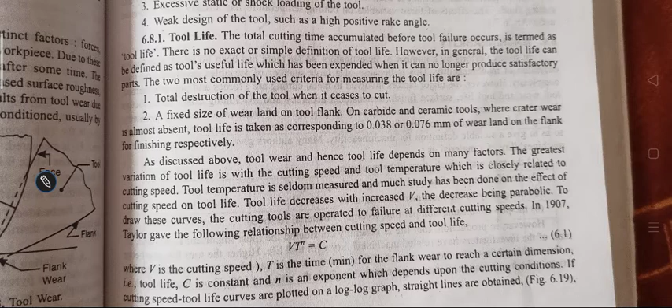इसमें बेसिकली जो टू मोस्ट कॉमनली हम लोग क्राइटेरिया यूज कर रहे हैं मेजरिंग द टूल्स के लिए, पहला ये होता है कि टोटल डिस्ट्रक्शन ऑफ द टूल व्हेन इट सीजेस टू कट. दूसरा, अ फिक्स साइज ऑफ द वियर लैंड ऑन द टूल फ्लैंक on carbide and ceramic tools. Where crater wear is almost absent, tool life is taken as corresponding to 0.038 या 0.076 mm wear land on the flank for finishing respectively.

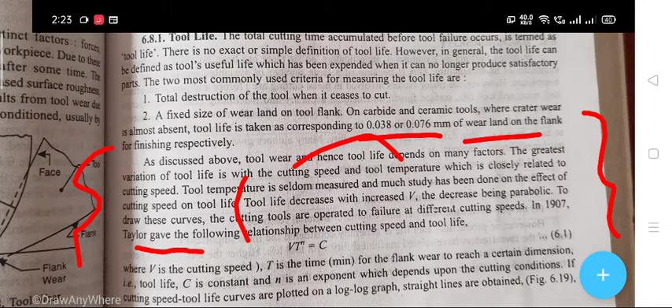टूल टेम्परेचर is seldom measured, so much study has been done on the effect of cutting speed on the tool life. So tool life decreases with increase in V, the decrease being parabolic. To draw these curves, the cutting tools are operated to failure at different cutting speeds. In 1907, Taylor gave the following relationship, that is V T की power n equal to C.

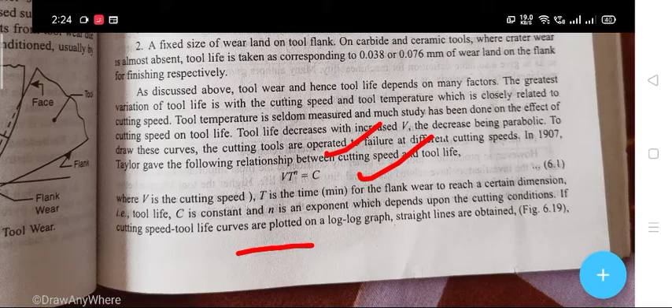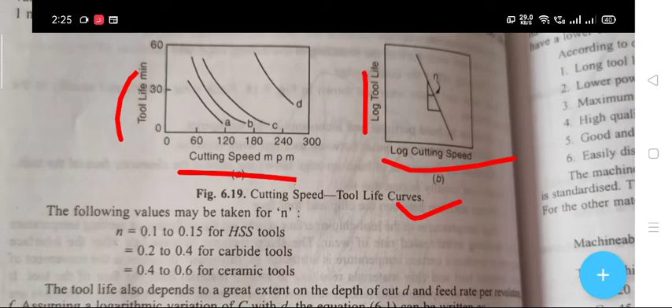There are following criteria for n values. n is equal to 0.1 to 0.15 for high speed steel tools, 0.2 to 0.4 for carbide tools, 0.4 to 0.6 for ceramic tools. The tool life also depends to a great extent on the depth of cut D and feed rate per revolution F. So assuming a logarithmic variation of C with D, the formula is V T की power n D की power m is equal to C.

It has been found that decrease of the life with increase in speed is twice as great as with increase in feed. So the right formula is V T की power n D की power m F की power alpha equal to C.

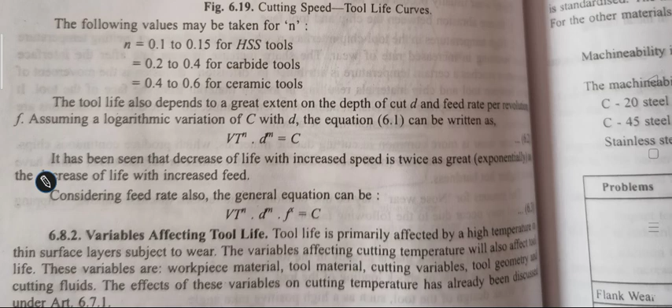Then what are the variables affecting the tool life? Tool life is primarily affected by the high temperature in the thin surface layer subject to wear, और जो variables affecting the cutting temperature will also affect the tool life. और ये जो variables हैं, वर्कपीस मटेरियल है, टूल मटेरियल है, कटिंग वेरिएबल है, टूल ज्योमेट्री है और कटिंग फ्लूइड है. These variables affect the cutting temperature, these are the variables affecting the tool life.